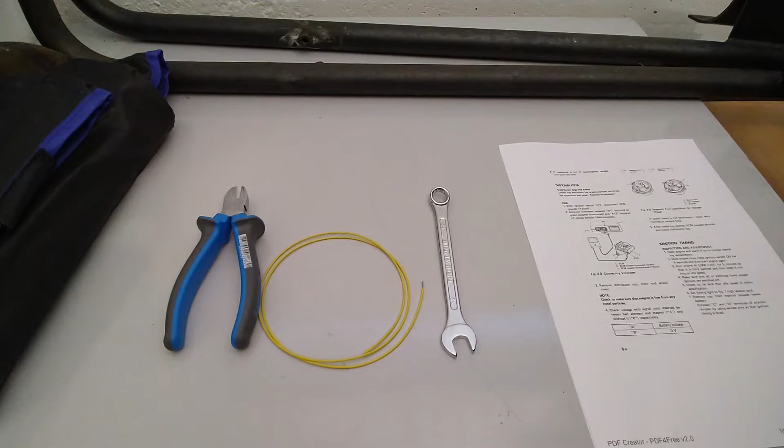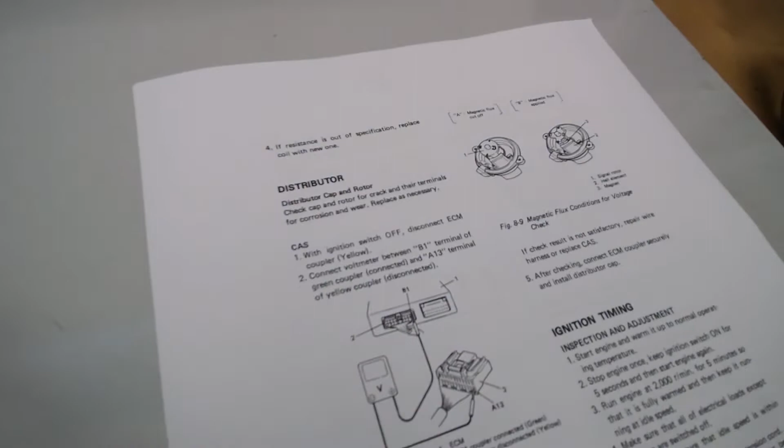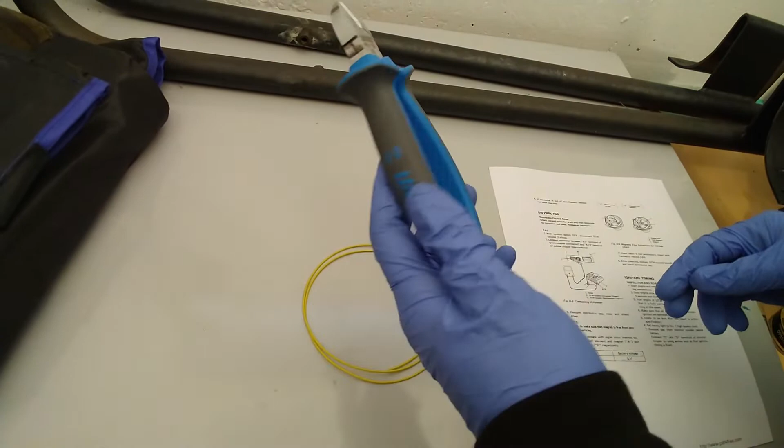Our off-road trip got cancelled because of severe weather and snow. So instead of that, we're going to adjust the timing on our 1.3 Samurai with electronic ignition. It should be a simple job. All you need is a 12mm spanner, a piece of wire, something to cut that wire and peel it off, and a service manual that tells you what to do.

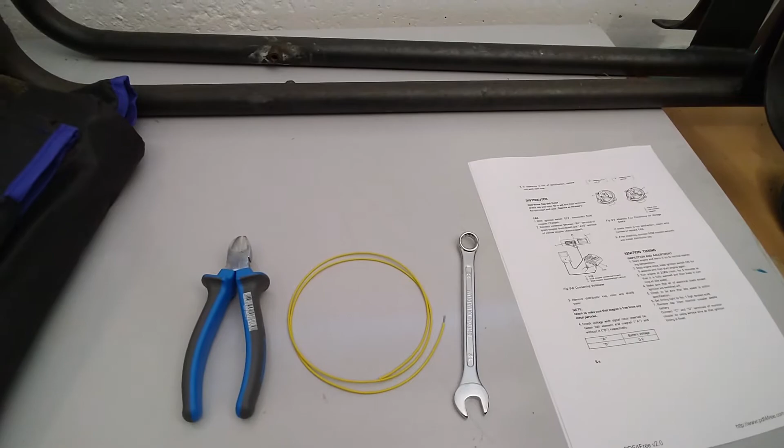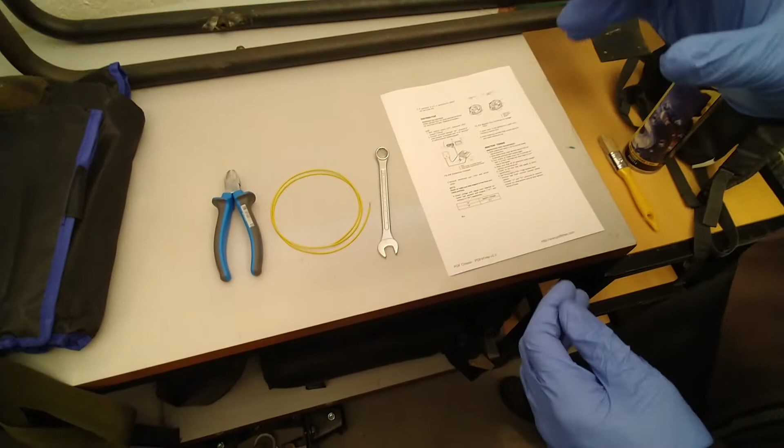Okay, but I have a very important question. What is timing? Timing is measured in degrees, and it's actually the angle at which the computer ignites the mixture in the cylinder. In this case, before the cylinder comes to the top of the compression stroke. That's called top dead center. Before it goes completely up, stops, and starts to go down, because the crankshaft goes around and all the cylinders go up and down all the time.

Okay. And when the cylinder sucks in air and fuel, then it compresses it, and then at some point it needs to fire that compressed mixture, so the mixture explodes and pushes the cylinder down. And to get a little bit more power and better efficiency, you actually ignite the mixture before the cylinder goes all the way to the top.

Okay, why is the angle important? Because if it ignites the mixture too soon, it will stop the cylinder going up and the engine will stall. If it ignites too late, you're losing power and have bad combustion. And if all of that is off in some way, mixtures, angles and stuff like that, you can have engine knock that will actually destroy the engine from the inside slowly.

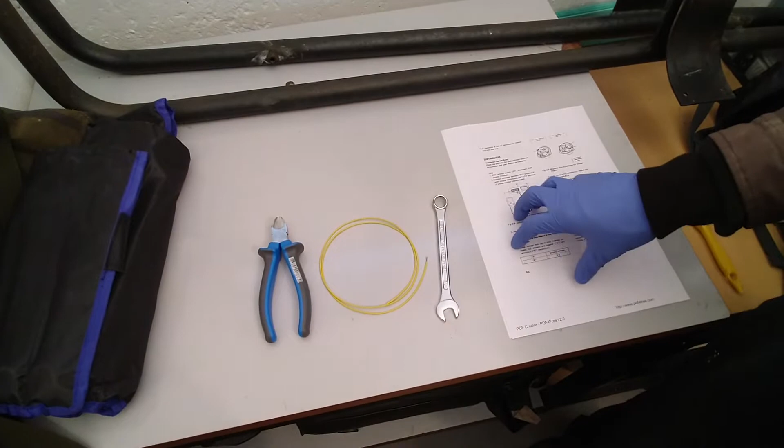Okay. So how many degrees should it be? Since this is an EFI engine, it has electronic fuel injection. We need to disable the computer using the wire, as specified. That's why the wire, okay. Then the computer will not change the angle of firing depending on engine speed.

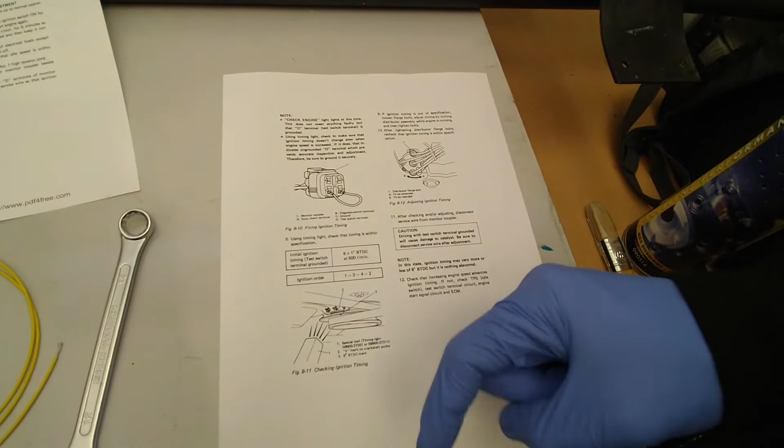So while the computer is disabled, we need to check the firing of number one cylinder, it's the same for all the cylinders but we're measuring only one, at 8 degrees plus or minus 1 degree before top dead center at 800 RPM. How will we know that it's at that speed? We have a tachometer in the car. We don't have a fancy tool for that, but we'll just check in the car.

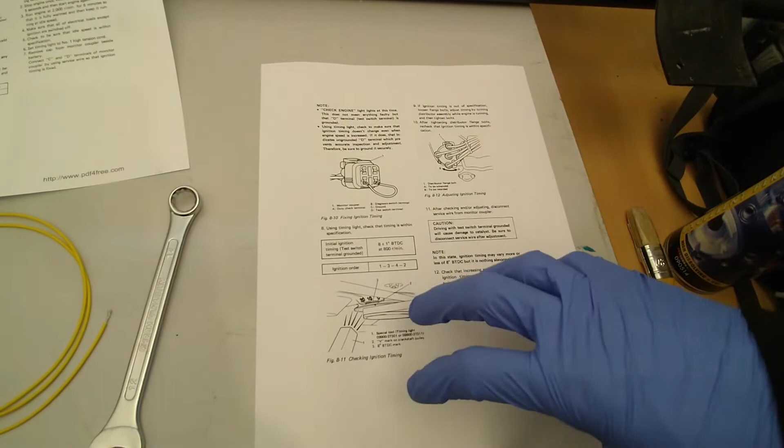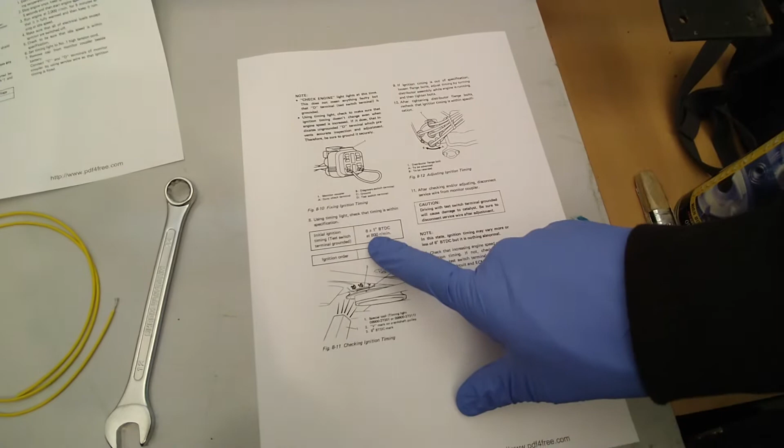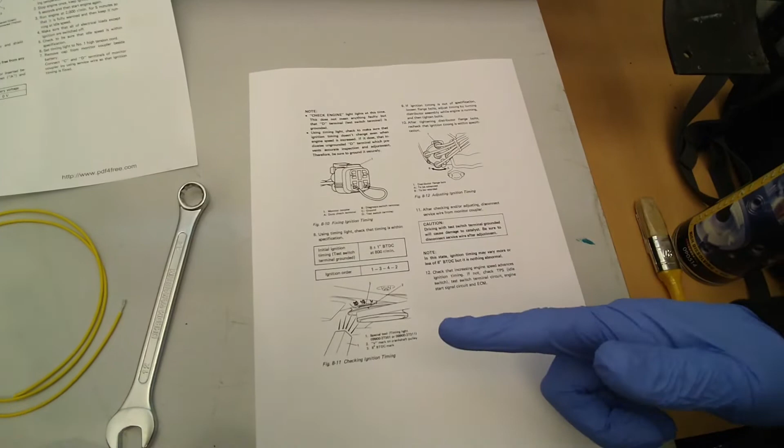And before we start, we need to warm up the car. We already did that. The engine is at operating temperature, and I checked inside that it is at 800 RPM when it's warmed up. So now we have two jobs before we continue. First is disable the computer using the wire on the service plug, I'll show you that. And the second is clean the timing marks, because we cannot distinguish anything from all the grime that is on them.

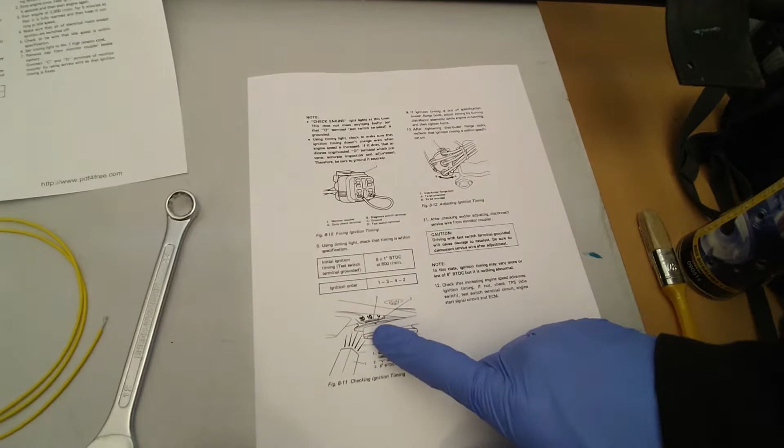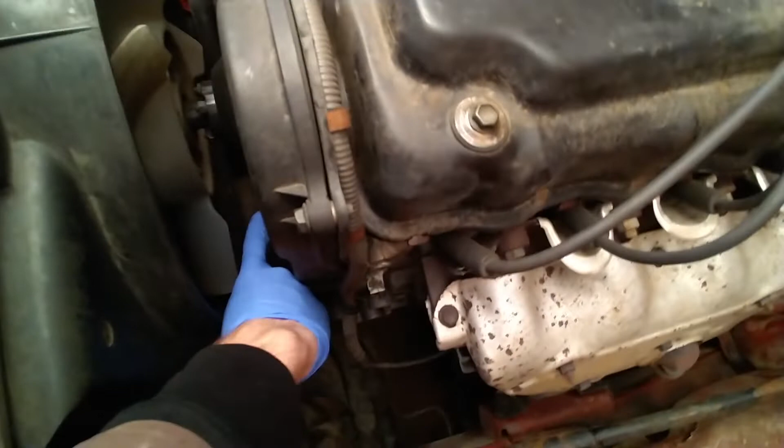Where is this located in the car? This is located on the front of the crankshaft, down here. It's a little bit hard to see, you're probably not going to see it on camera, but I think there are also timing marks on the flywheel, on the back. I think they're all the same timings.

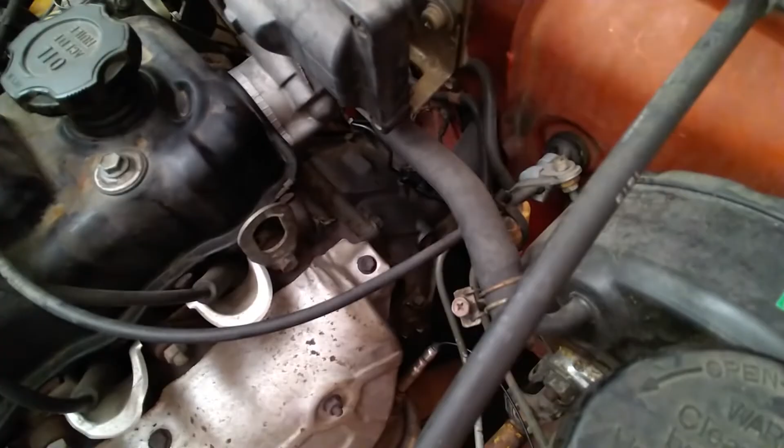There's a service plug here on the transmission bell housing, and if you have a carbureted engine, not an electronic injection one, I think there are no markings on the front, only markings on the back. But we'll start on the front and see what happens.

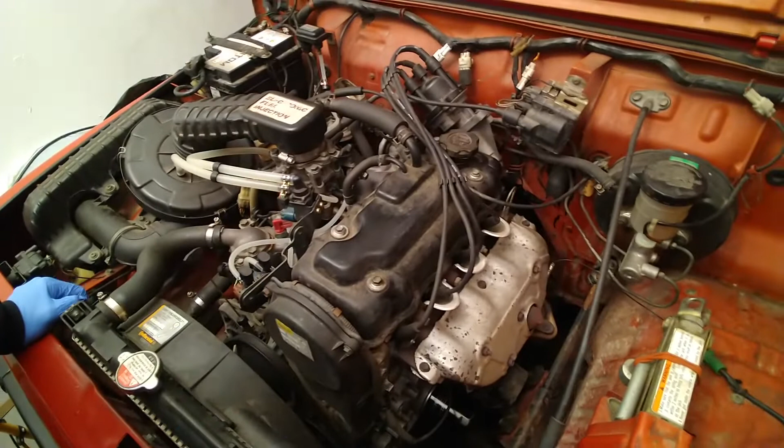Of course, we never did this before, because this is an era of car that has some electronics, but not all of them. So you have some legacy stuff, like you need to adjust timing by hand, but you also have new stuff like electronic fuel injection. And 10 years after this was made, all of this was obsolete, because the computer had much greater resolution to see the absolute and relative angle of the crankshaft, so it modifies all that on the fly. This is a very rudimentary system, so we'll see what happens. Okay, let's try. I'm really interested in that.

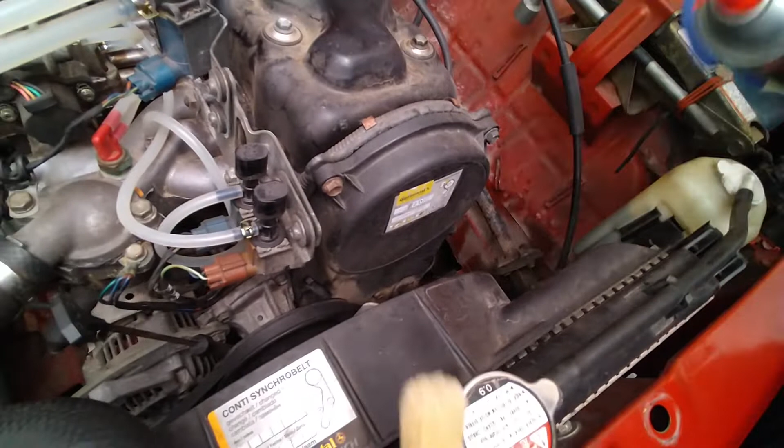You're cleaning everything with brake clean. Yeah, it just degreases everything, and when it turns to dust, you can actually see what's going on. You can actually remove everything. I know that maybe brake clean is not the most optimal thing for everything, but it's really good enough when everything is greasy and grimy. Yeah, you're using it a lot. I know, but nothing on this car is clean. So we need to clean it eventually at some point.

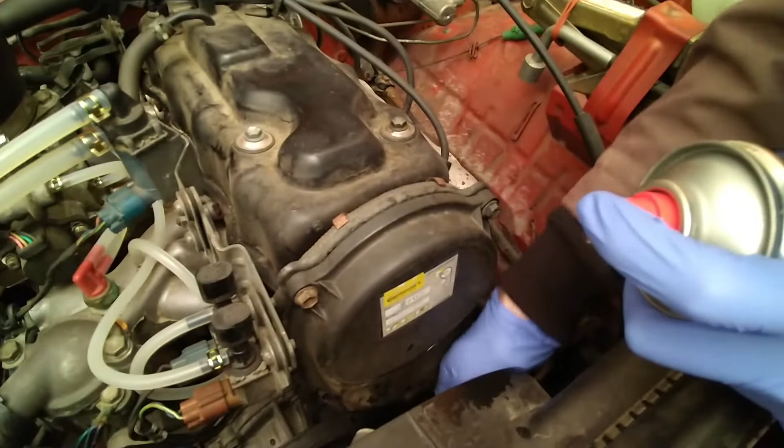I had an idea to clean the whole engine bay and the engine with a power washer after the road trip, but since that didn't happen... I mean, it could use some washing. It's dirty and dusty, but the problem is the grease. The grease sticks to everything, and then everything else sticks to the grease.

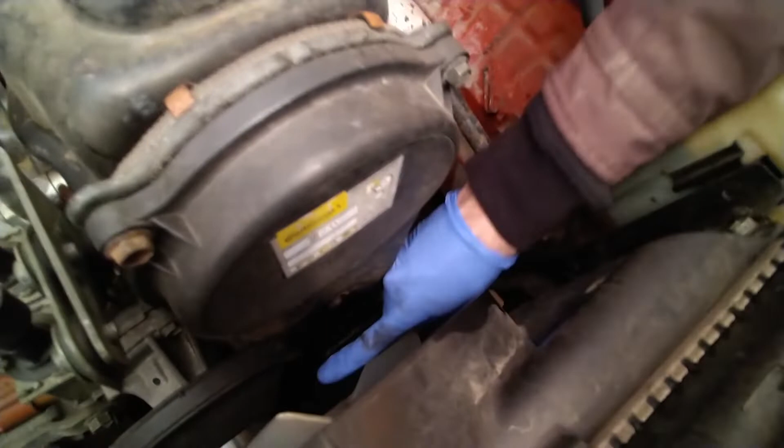I think that is clean enough. Really? Because I still can't see anything. I know, but I can see the markings, and they will be illuminated with the timing gun. Okay. What's that? A timing gun, I will show you. But before that, I will try to remove the service plug here on the bell housing, so we can see if there are markings there also.

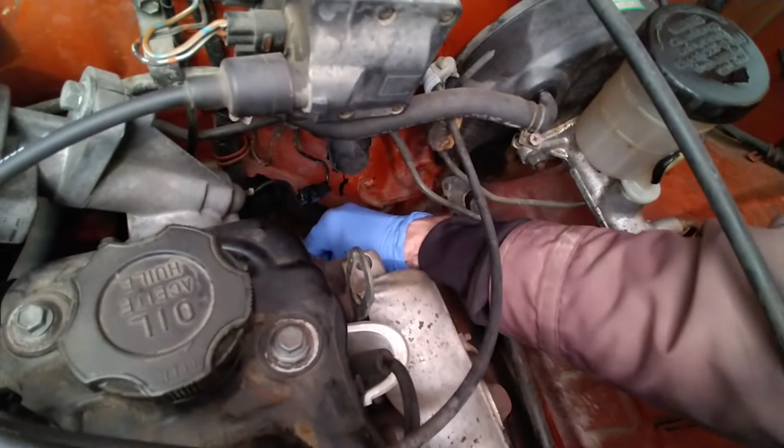Something fell down. It didn't fall, it broke. In half. Great. Good that we got a new one. This is really shit. This never came off. I cannot remove it by hand and I don't have any tools. So we'll just use the front marking as the manual says. Okay.

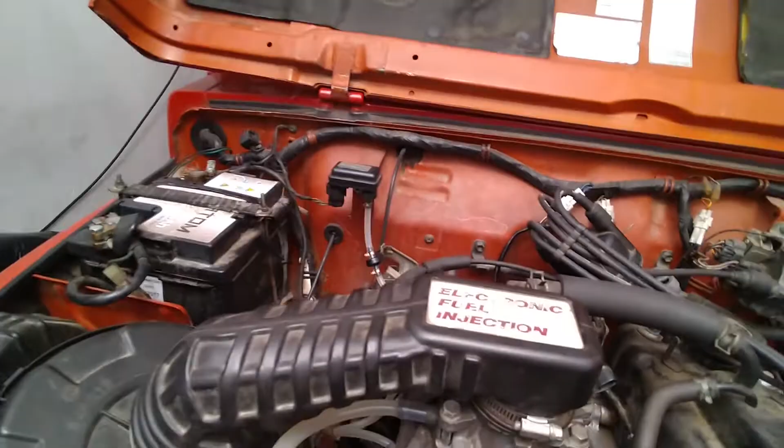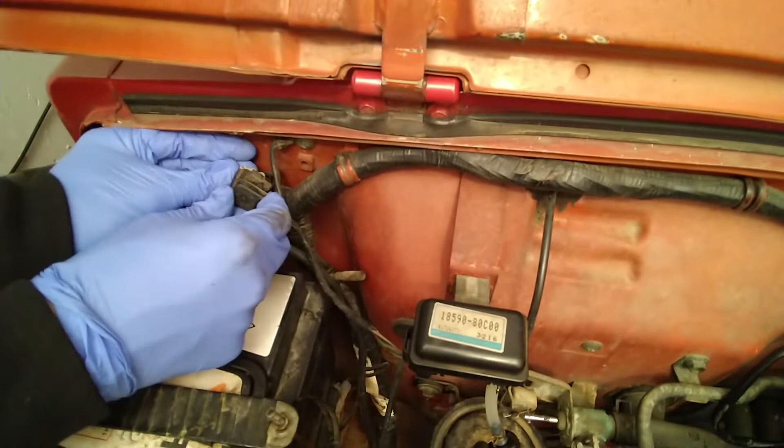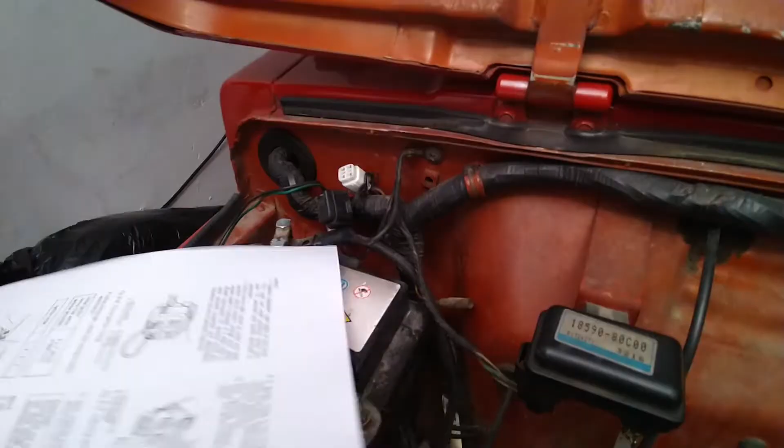Let's put the wire in the service plug by the battery. And then I will explain to you what a timing gun is. So the EFI models have this plug here. I think this is it because that is the only plug that is here. It's small. I think that is the plug. Should we check again? There are four terminals. I imagine this is much bigger. There are four terminals here. Which is which?

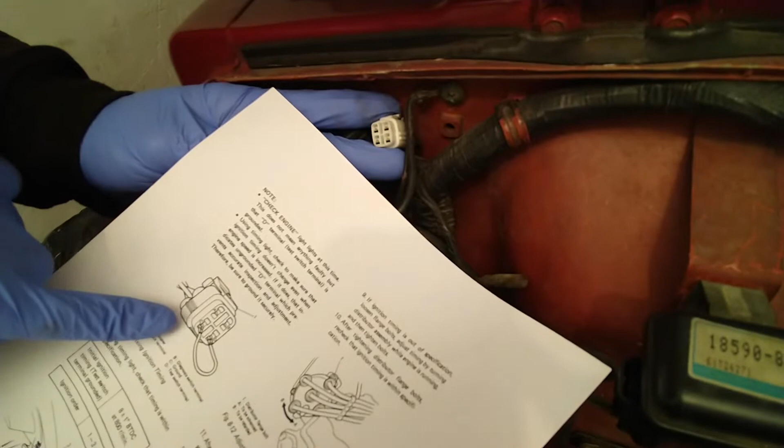Well, if I had my multimeter with us, we could check, but we can see by those grooves here. These grooves. So A, B, C, and D terminals are noted here. C is ground and D is the test switch terminal. Okay. I have no idea what that means.

We need to put a wire between C and D, so we ground the signal wire that goes to the computer. At that point, the check engine light should be on if we turn on the car, as it says in the manual. But nothing is faulty. That just means that it is in the testing, checking mode. So let's put some wire in here. This manual is cool. It literally says hack your car.

Let's make a new tool. If we had a soldering iron, I would solder the ends. It's gonna be fine just like this. You'll just stick it in? Yeah, I'll just stick it in and hope that it makes good contact. Actually, maybe splice it a little. I'm just going to roll it over like this, so it's better. Yeah, so it friction fits in. That should be good.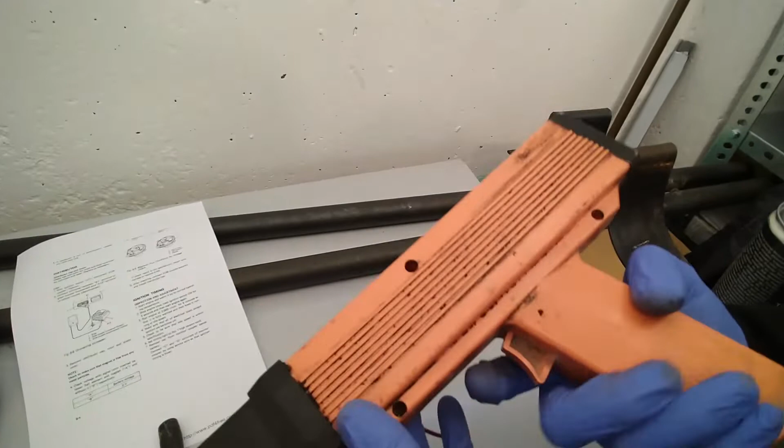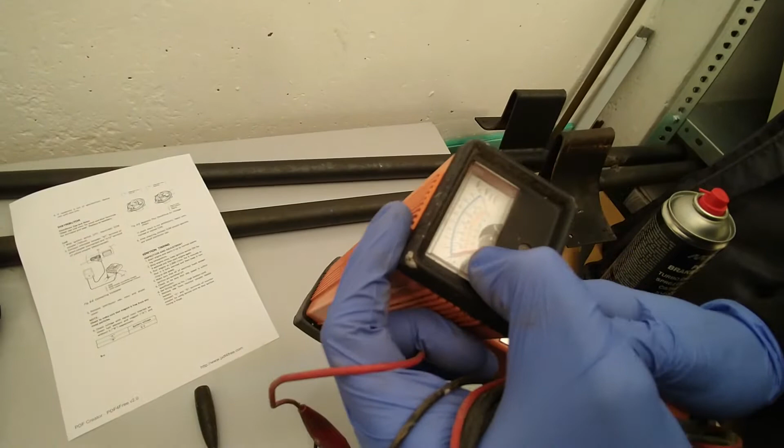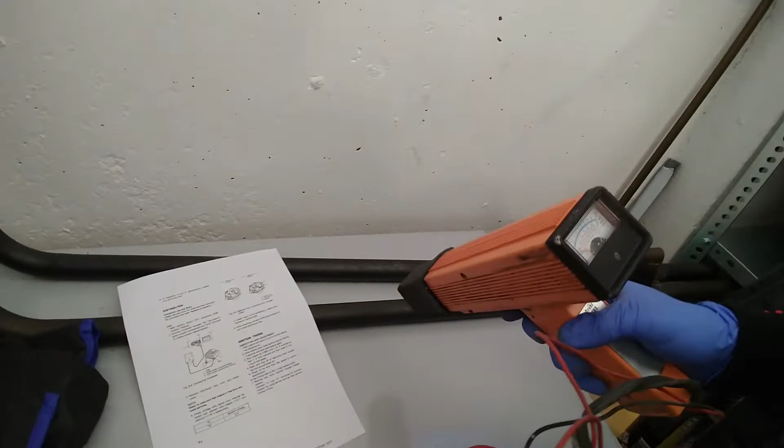This is our old school ignition timing gun that we borrowed. Wow, that's really old school. It's vintage. Do you know German? What is this here? I don't know. Tacho, I know what that is, but what is the first thing? Don't know. I have no idea what this is. It has battery voltage. It has some timings here. I think this is just an on switch. Let me see it in the front. It's just a lens.

With a speed light in it. How does it work? What is this? Okay, this has too many plugs. We're not gonna use this one. You have another one? We're gonna use this one. I know how to use this one. I never used it, but I know how to use it.

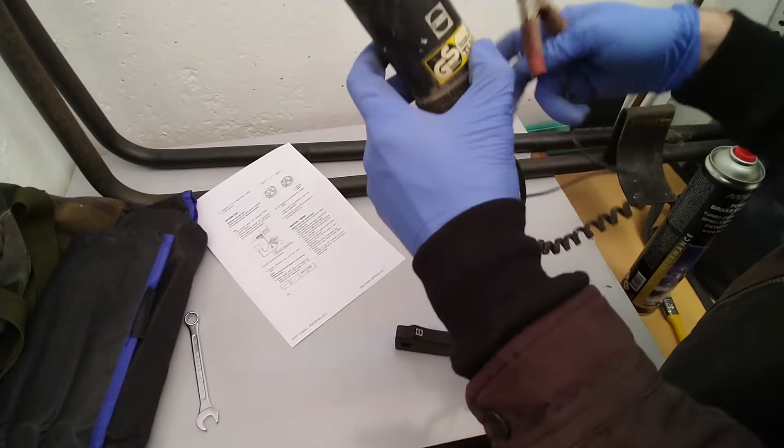So the same thing. It has a lens in the front with a speed light in it. This is the on switch. You plug it up to the battery, so it has power for the flashlight. And this is the lead that goes, you open it like this, over the high voltage cable of the spark plug of cylinder number 1 on our car.

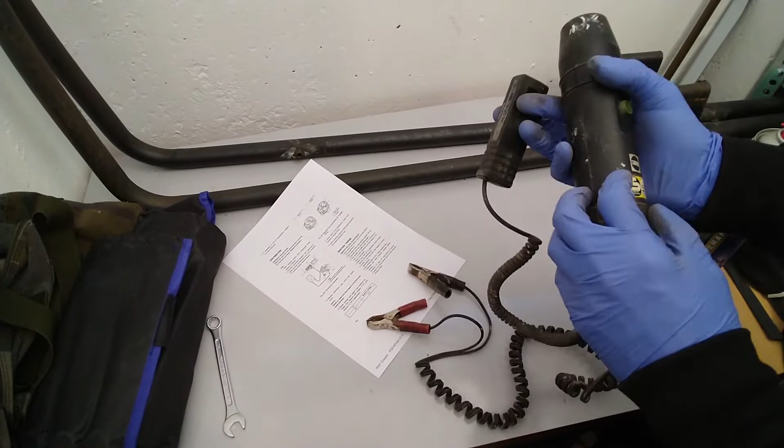Every time a high voltage passes through the cable, it makes a magnetic field. This clamp picks up that magnetic field, sends the impulse to the gun, and the gun fires. Oh wow. It's more complex than a car. No, it's not. This is extremely simple. You can do this with basic electronics. And this is really dirty, mine.

Your eyes are too slow, and when this causes a flash, your eyes see the crankshaft still, and you can see at what point the flash occurred.

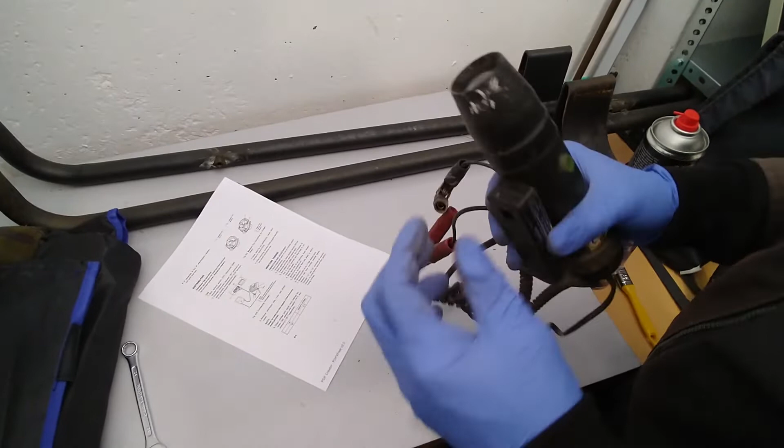And because the engine is running all the time, you can check at what point the engine fires. So we're going to see some markings when this flashes. When this flashes, our eyes are going to see at what point the flash occurred. If we look here, I cannot find it or see it, but I'm sure it will be obvious when we start.

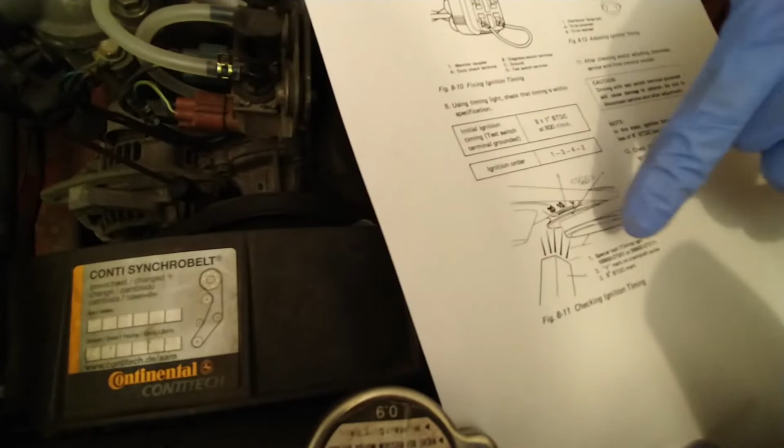But in the manual, we have the degrees. There are markings over this. What is it, the wheel? On this pulley, there is a mark. So the flash will occur when cylinder number 1, I think it's this one, the closest to the front, fires. And at that point, we'll see the mark align with some amount of degrees.

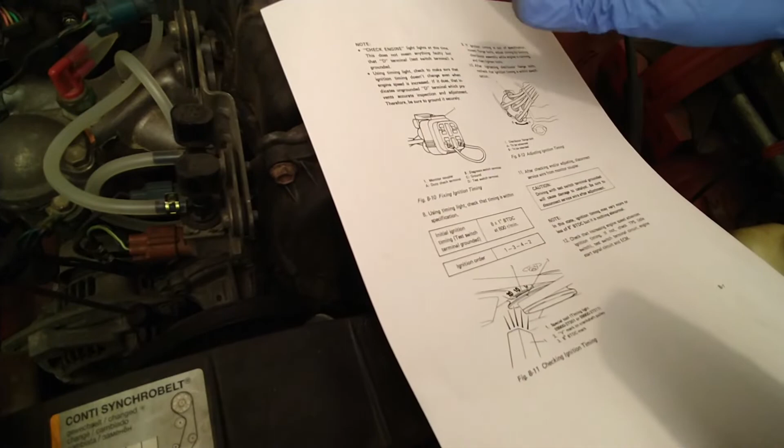And then with our eyes, we'll see at what point before top dead center, because it rotates like this, so it goes to 0, the cylinder fires. If it's at 8 degrees, we'll just leave it. If it's more or less, then we are going to loosen up this bolt and physically rotate the top of the distributor, so it will advance or retard the timing a bit.

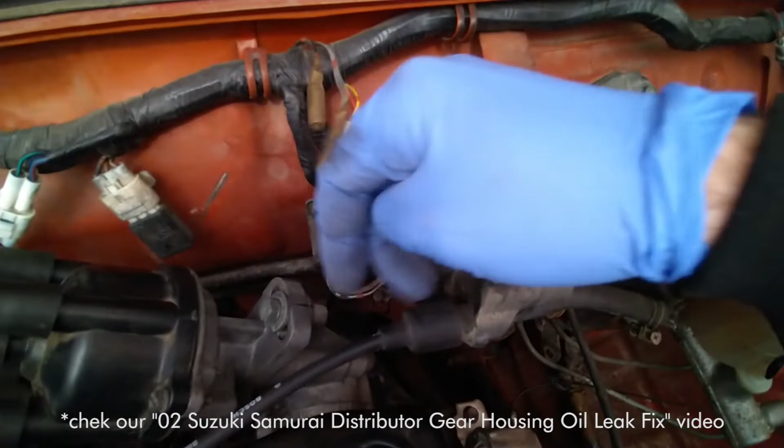And then we are going to trick the computer so it thinks the engine is a little bit ahead of or behind the point that the computer thinks it is. So we adjust the timing of the firing of the engine. Okay, now I get it. That's why this hole is so wide. Yeah, and that's why we marked it here when we were changing the O-ring, so we put it roughly in the same place and it works. Now we're just going to check if it works as expected.

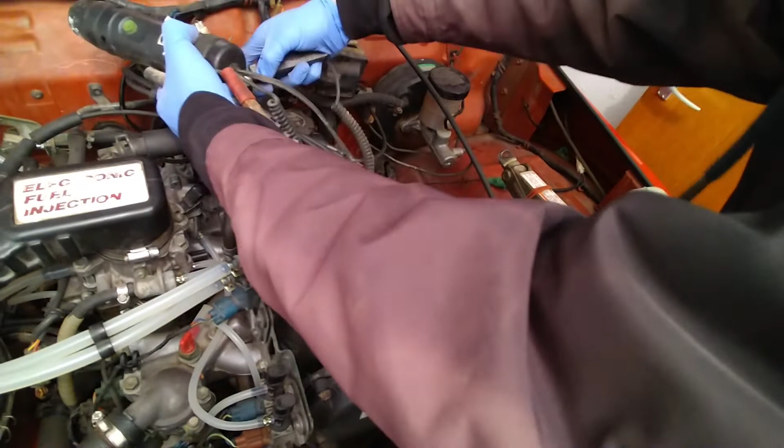So what is first? The clamp here. This just goes around the cable, it doesn't have to be pressed on. It picks up the magnetic field around the cable because the cables are unshielded. We put our gun here, and this is for powering the gun. We're gonna plug it on the battery terminals. Minus. Nothing sparking. Plus. You have to be sure with something this old.

Are we sure the tool is working? No, the engine needs to be firing so we can see the flashes. We'll leave this here, away from the exhaust. We put everything on this side of the engine so it doesn't get caught in any moving parts in the front. Now we're going to start the car and see if the gun is working. If it's working, we'll let it warm up a few minutes and let the idle be stable. Then we'll check the markings and at what crankshaft angle the cylinder fires.

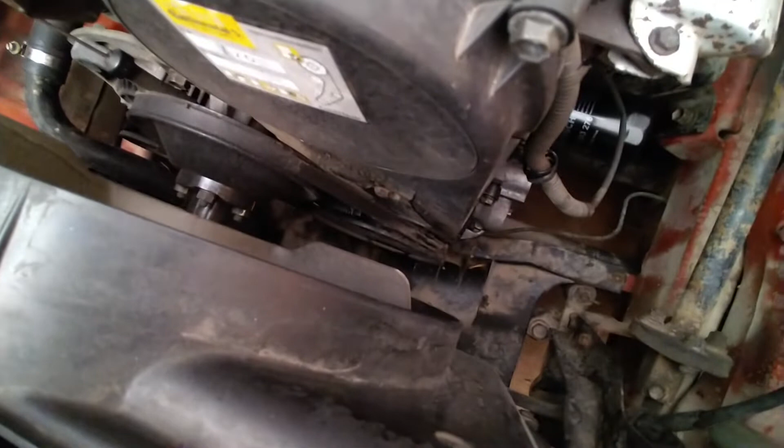I can see those markings now. Maybe. The problem with filming this is that the camera shutter is not synchronized with this, so you might see just half a frame or part of the frame. We'll try to turn off the main light in the garage so the shutter timing gets longer, so maybe the camera will pick something up. But now let's turn on the car and check if the gun is working.

We should not turn on any electrical accessories like lights. Everything needs to be off so there's minimal load on the engine. Let's start. It's running smoother than when the computer is on. Still a bit high. We'll wait until the revs come down to 800 RPM, and the check engine light is on. Let's rev it a bit so it gets warm faster and the revs get down. You can try to see. Oh, great. It's working.

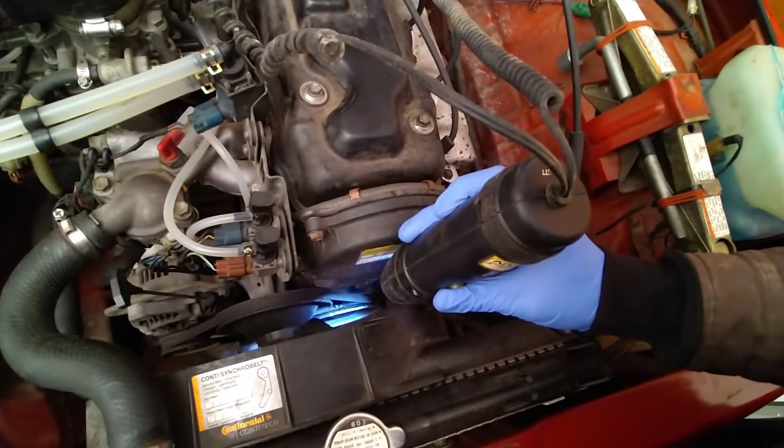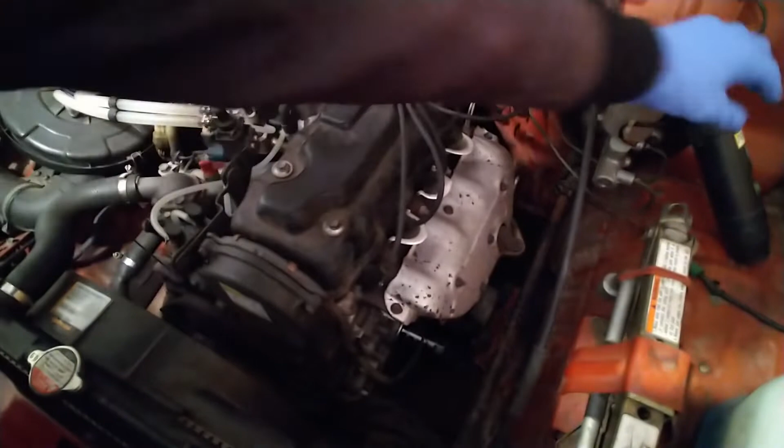So the engine is up at operating temperature. The idle settled down to 800 RPM. Now we can get our gun and see where the timing is. What do you see? It is at 8 degrees. 8. It is actually spot on.

This is a big mark, so yeah, I know. I think it could be 9 and 7 as well. Well, it says plus and minus 1 degree. Okay, so that's why.

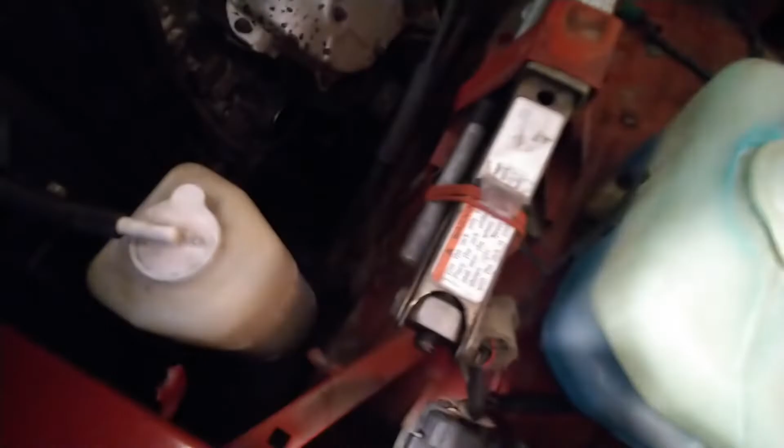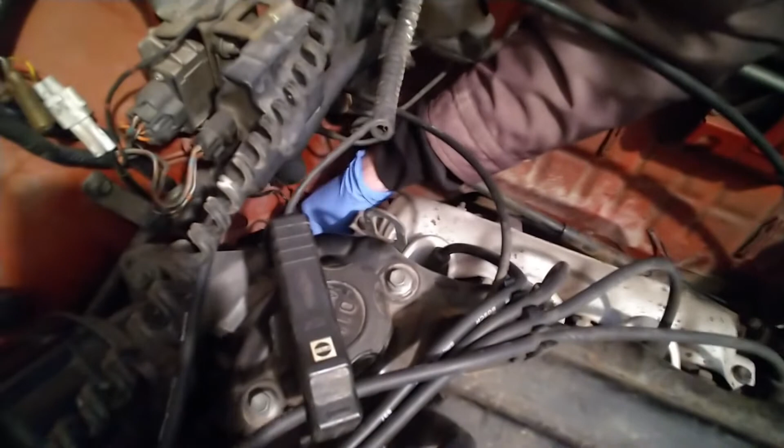I think what we will do now is pull the plug of the transmission bell housing all the way and see if we have a better mark there. Just because we're already set up and everything, and just to see what that mark says. I'm going to try to get to the mark on the other side of the engine, which is on the flywheel. And this is great to do near a hot exhaust while the plug is falling apart bit by bit. Be careful.

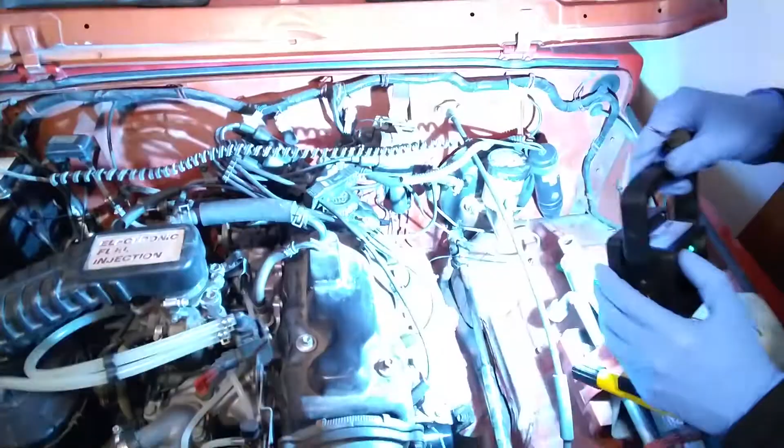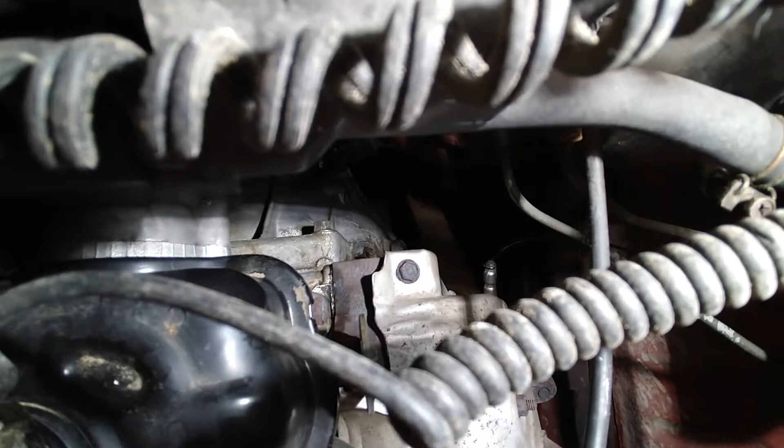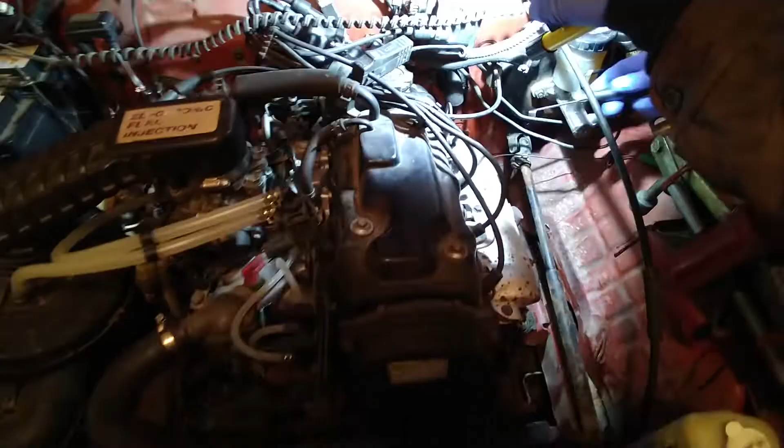I'm just trying to fish out. Oh, something fell off. Yes, I know. Oh, it's just old rubber. It will disintegrate if it gets in the gears or something. I think we got the most of it. I hope so. Let's just try to find the plug, because I cannot locate it on the floor.

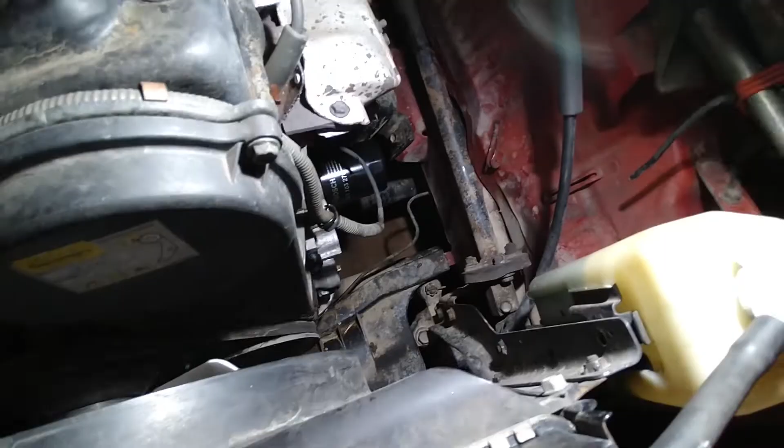That is interesting. Yeah. How big is it? Like this. Oh, that's small. So it's not that small. And that is the problem. I cannot find it. We found it. Where is it? After extensive search and rescue. It is here in the engine mount, because of course it is. Oh. So this is what's left of the plug.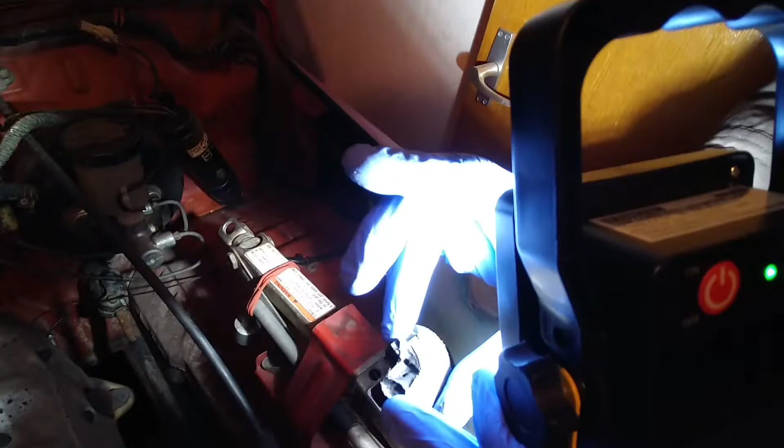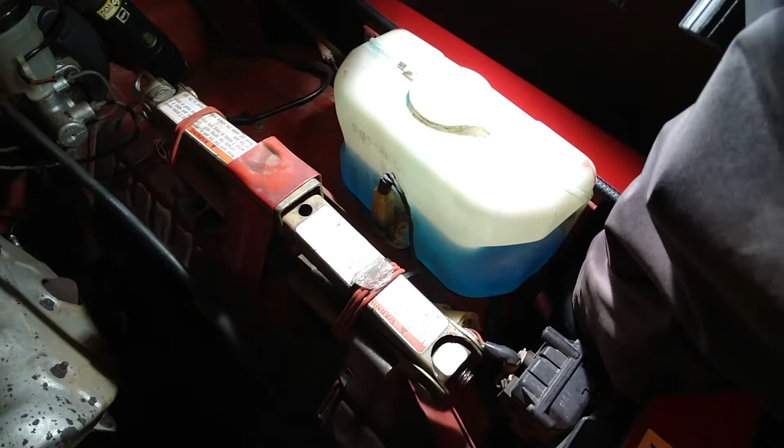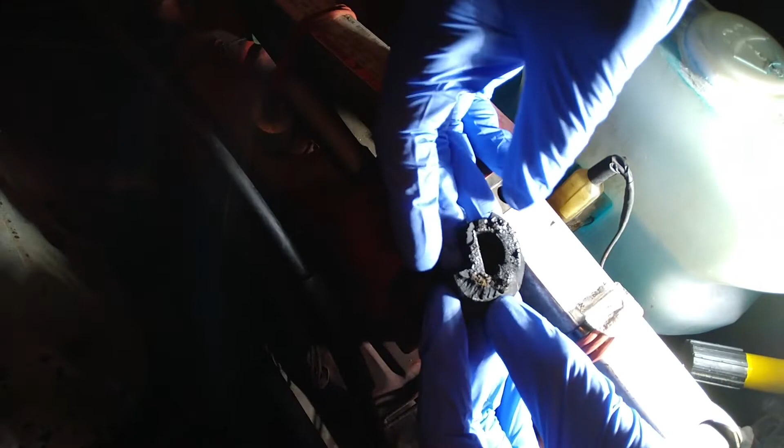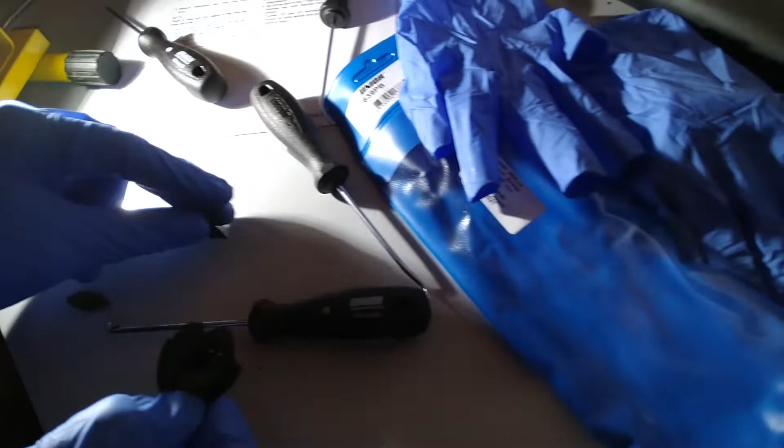It started coming apart. You see that on the camera? Yes. It started coming apart around, and then I stabbed it with the O-ring stabby thing, and a part of the inside was left on the inside of the bell housing. I took that out. This is this part here, I think. No? I think I have dropped it somewhere on the floor. Let's just say that we got all the pieces out.

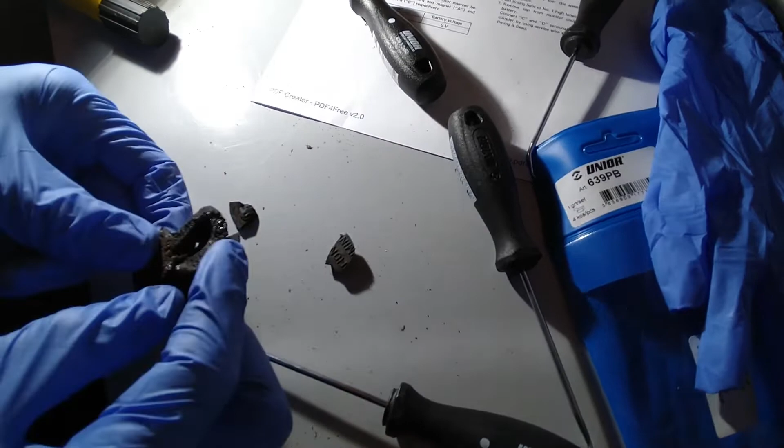This is oily and greasy. Yeah. From all the oil that was dripping from the distributor gear housing, which is not dripping anymore. So now let's turn the engine on again and see if there are markings on the back of the engine.

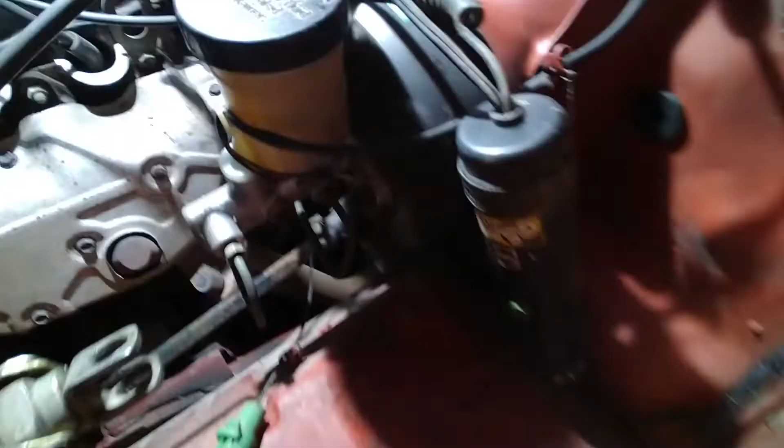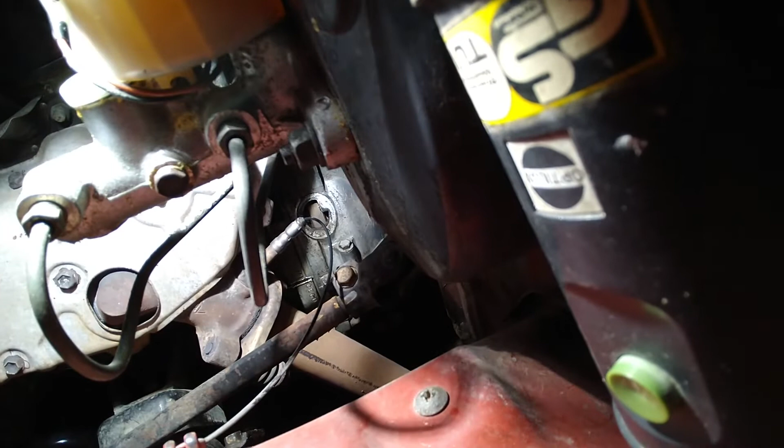Do you see this hole right here? Right here. Yes. The thing inside that you can see is the flywheel and the gear for the starter motor on the flywheel. Okay. And somewhere on that flywheel there are marks. And those marks should align with a flat spot, with this flat spot here. So let's start the car again and see what the markings on the back of the engine say. Okay. Do you see that? Yep. Oh, now you see it.

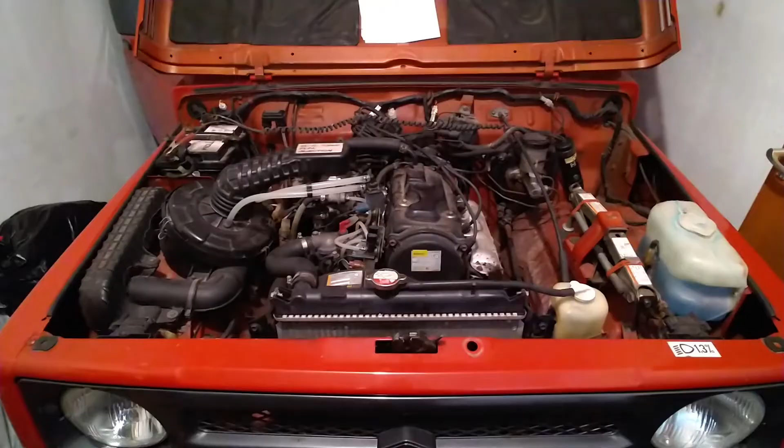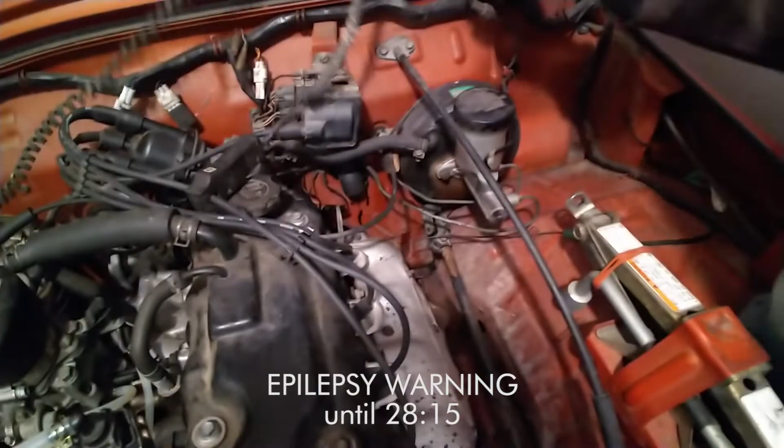We're just going to rev it a bit so all the coolant goes through the engine and the temperature is stable. So now it is idling. And there are some markings here, but they are hard to see. There are much bigger markings here because the diameter is bigger, so they are further apart. And let me see what they say. They say, I think that's 9.

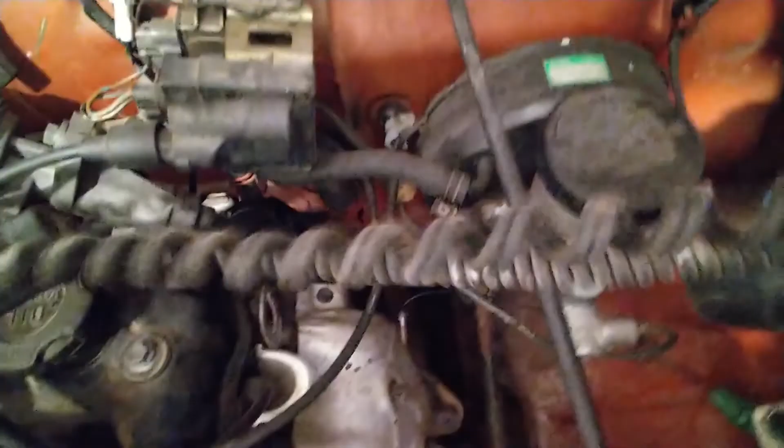I don't know, because the hole is quite small. I cannot see from 0 to 10, so I don't know if one mark is 2 degrees or 1 degree. But this is either 9 or 8. But it's fine. So yeah, it is fine. I will try to get it down there. I'm not sure if the camera picked anything up, but we're gonna call it good enough. Yeah, it's either 9 or 8. So this is good enough.

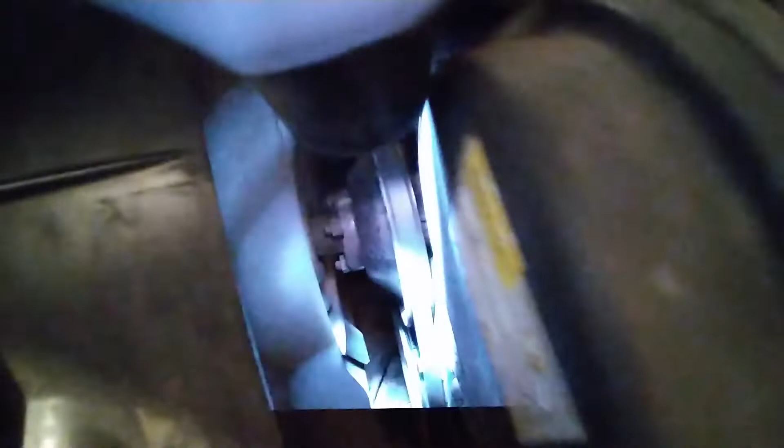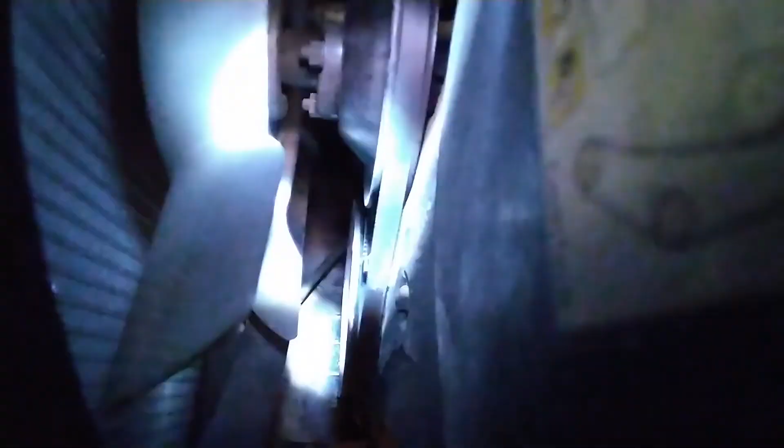The higher the engine speed, the more advanced the timing. At idle it is about somewhere in between 4 and 6 degrees, while the computer is managing the timing. And when you add the throttle, it goes to 10, 20, 30. It goes all the way to like 30 degrees.

So in the end, we didn't have to adjust the timing by rotating this. It was already okay. We just checked it, and since it is okay, we'll just leave it there. Okay. That's it. Great. But if you need to adjust it, that's how you would adjust it.

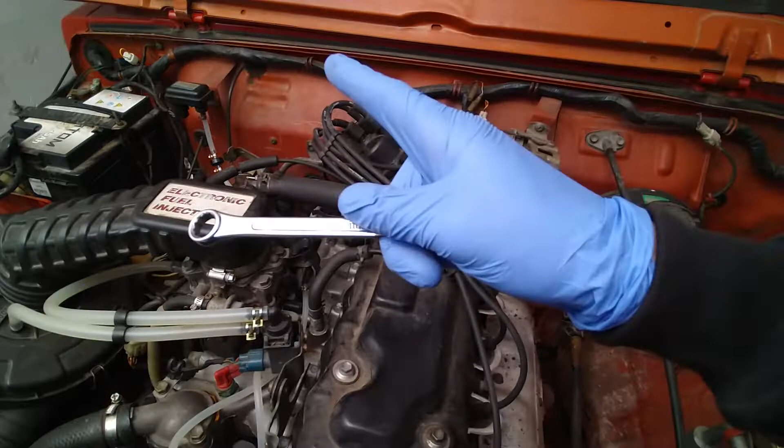I think the most important part of this is the check wire, because if you don't do that, the computer will walk here and there with the timing a little bit more or less, and you will not be sure if the thing is firing stably or if something is wrong. So you need to disable the computer to do this procedure, and everything's gonna be fine. Okay, so that's it. Let's clean our tools and we'll finish for today.